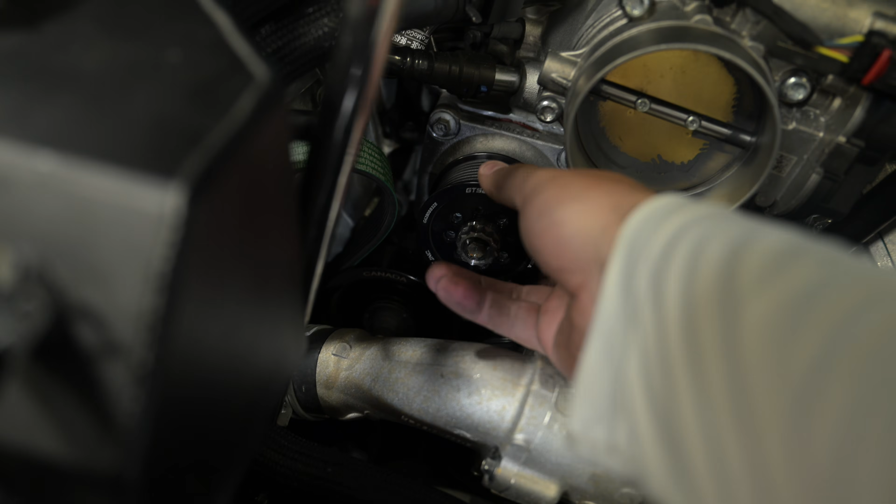Now that I'm here, we can do some computer tuning on this stuff. We don't need to boost them as hard as they were before, especially with the extended RPM range we get with the tuning, and my ability to actually fine tune the calibration to just increase power with just the calibration over just adding boost. So Chuck's up here right now. He's actually switching the pulley on it to a 2.95 over the 2.8 that's on it right now.

The 2.8, now that we're able to rev the engine up higher, and we did some further track modifications to the exhaust, it's almost not necessary. It makes a little bit extra heat in the blower when we're road racing them.

Now this car does have the VMP lid and intercooler on it, but we're gonna increase the pulley size, drop the boost, and I think we'll be able to get the timing up another degree or two, and it's gonna smooth this curve out nice and round, like what you'll see on an E85 setup. This car is making really nice power. It's making big fat torque down low because of that smaller pulley and the added boost down low over a stock pulley car, like we've done on some of the other cars, like mine and Chuck's car.

So what I really want to see though is this kind of wavy area here where the power curve isn't really nice and fat and round. We want to try to smooth that out a little bit. So we're going to drop the boost, reduce the pressure, reduce the heat, and add some timing in. And I think we'll end up with a better driving road race car.

So again, the focus of some of these cars is road racing, and that changes the focus from a drag race or somebody that just plays around the street. It definitely changes the focus because heat is our enemy on a road race car. Stuff gets really hot, especially on a 90-degree August day. So while Chuck's finishing that up, I'm gonna hit the keyboard, make a couple more changes to compensate for the less boost. We can add some timing in, and we'll make another couple pulls on this thing and see where we end up.

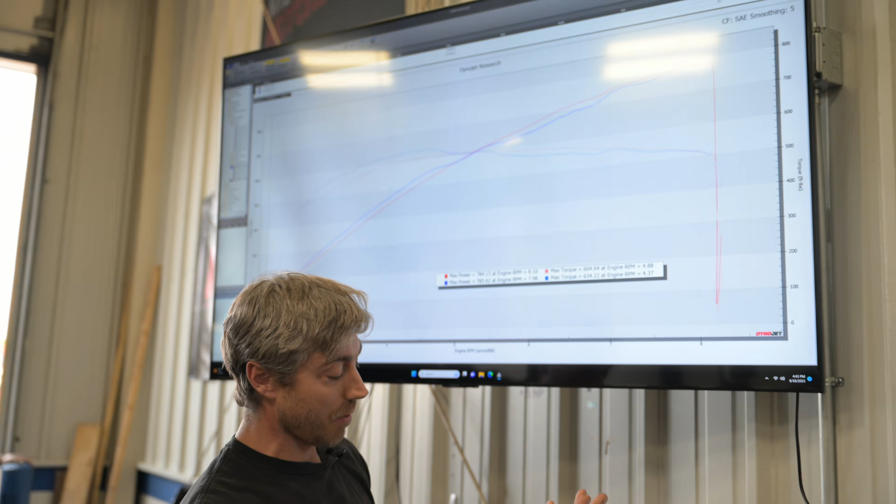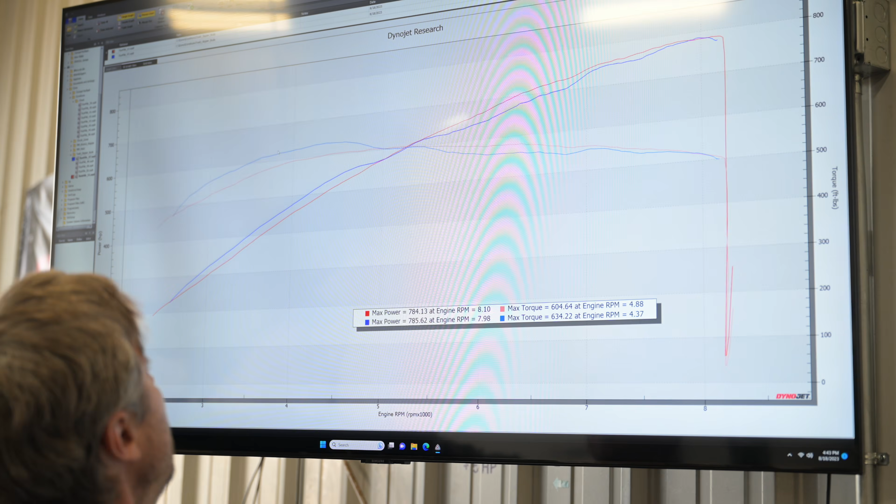All right, guys, so we got this thing dialed up on the dyno here. So again, pump gas with the 2.95 pulley. So we'll kind of go over the graph here. You can kind of see what's going on. I got the first run we did with the 2.8 pulley. That's the blue, and then the red is the 2.95 pulley, after we did some more tuning on it. So the goal here obviously was to smooth that graph out like I was talking about before.

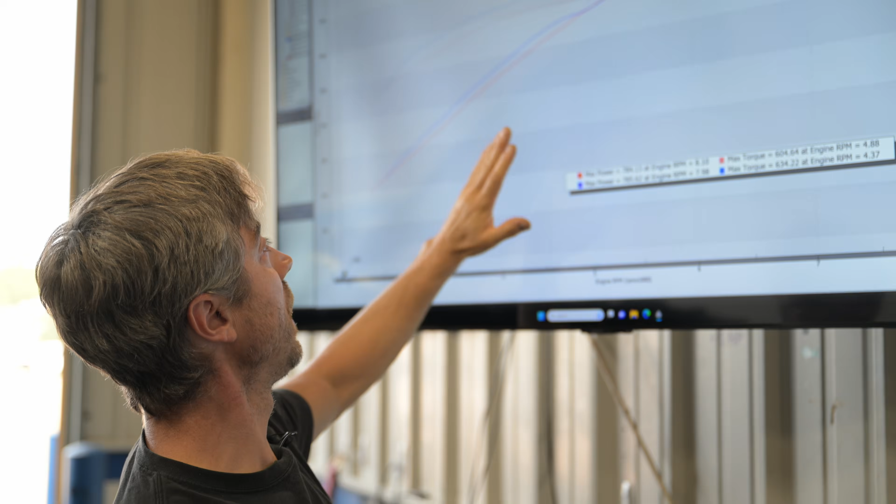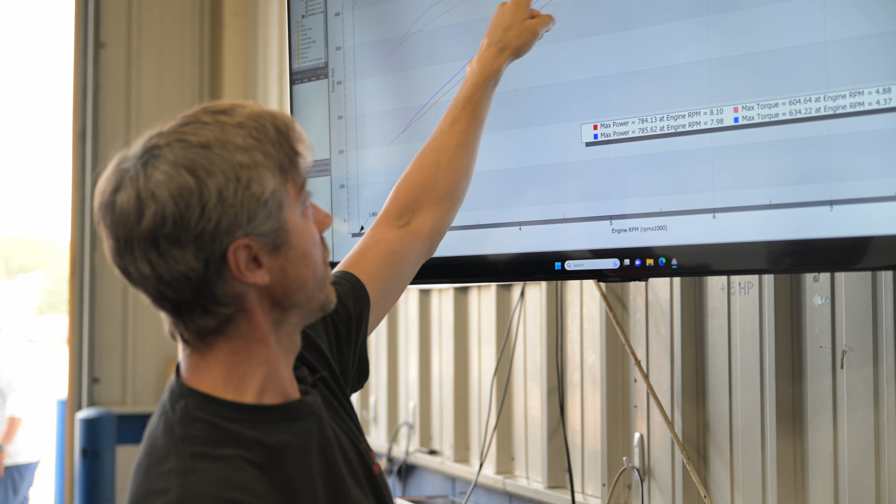So you can see, when we look at this down low, bigger pulley, we lose boost, we're gonna lose a little bit of torque down low. But the nature of what this car does for road racing, we don't need a whole ton of torque down here. If you roll onto the throttle coming out of a corner, especially in second or third gear with this car, in this area at 4,500 where we did lose some torque, you're into the traction control anyway. So there's no need to have all that bottom end torque. You're into the traction, you're spinning tires, it's upsetting the car. So it's gonna be a little easier to drive this way actually.

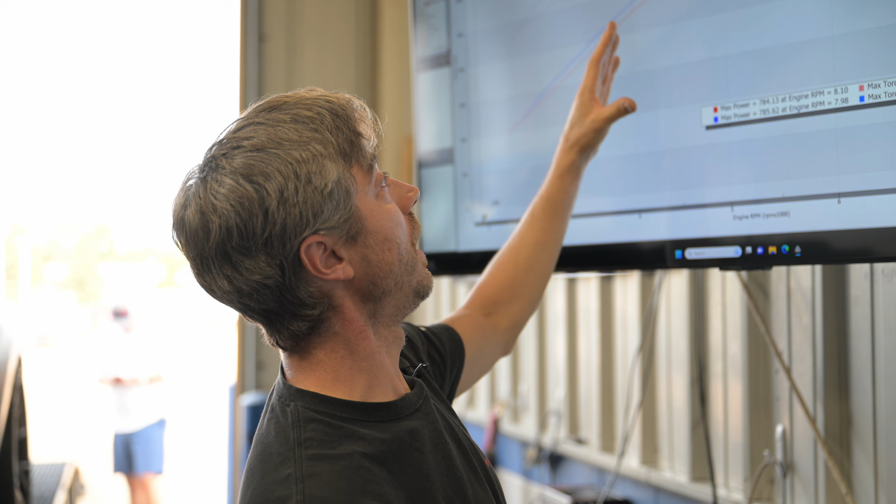And then if you follow this red line, you can see how much smoother this is now. It's not where that blue line was kind of dipping down, where we're making more power with less boost, which means less heat in the blower. Again, good for road racing. And once we finish it out on the top end, we're making almost identical power. Now it's within one.

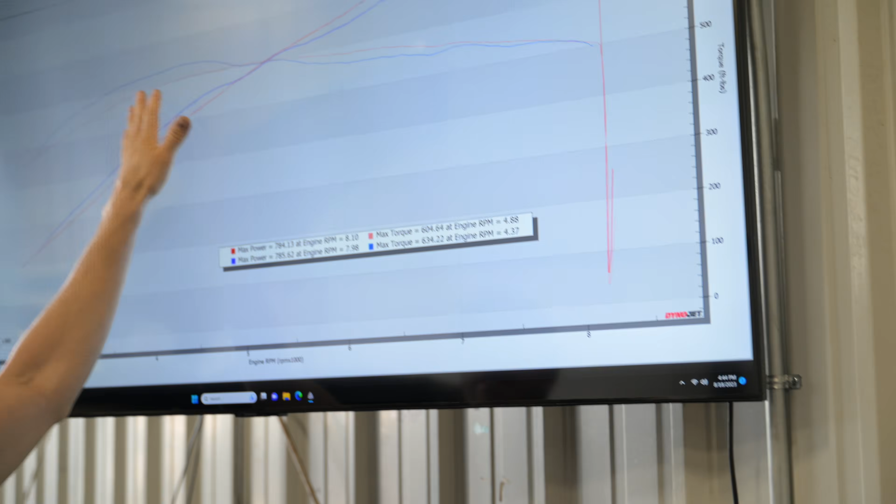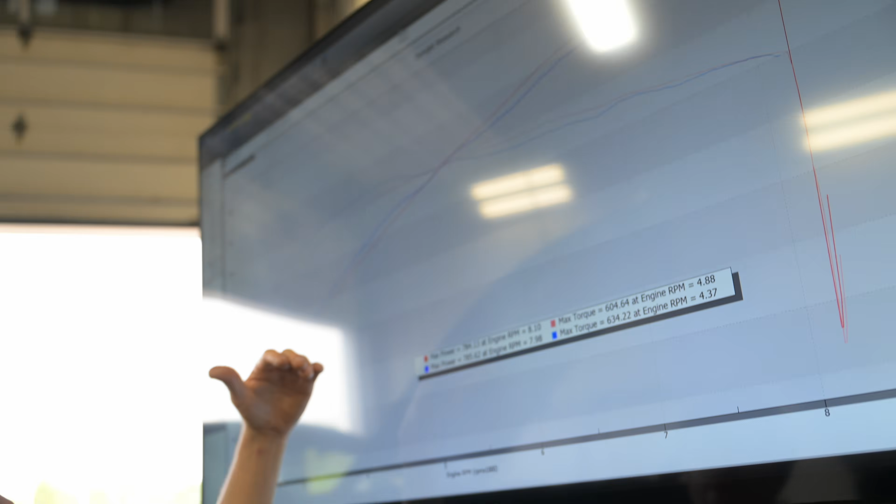So you can see, again, I'll go over the torque. We lost 30 pound-feet of torque down in this bottom area, but again, you're into the traction control here. So on these cars, they just have so much power when you're coming out of corners. It's really hard to control as it is. So we're not going to miss that torque at all down at the bottom.

Lower boost, lower blower temperatures, more consistent on track, a lot smoother power curve. This car is going to accelerate down the straightaways much faster than it did before, and at much safer heat and temperature levels, and the tune is all around safer now. So yeah, they're unstrapping it right now. This will finish it up for this car. Again, we're going to the track next week, and we wanted to get this one ready to go.

He's a good customer, a good friend of ours, and we wanted to get him all set up now that we got the dyno. Obviously, this dyno is such a powerful tool for stuff like this. Street tuning, I can get it close. I did a little bit of street and track tuning on this, just kind of a quick and dirty. And so I was kind of close on it, but when we reviewed it on the dyno, I was like, you know what, let's put a bigger pulley on it, drop the boost down. I think I can hit the same peak number with the bigger pulley, a little more timing, because we're octane limited on the pump gas. So that'll wrap it up for this.